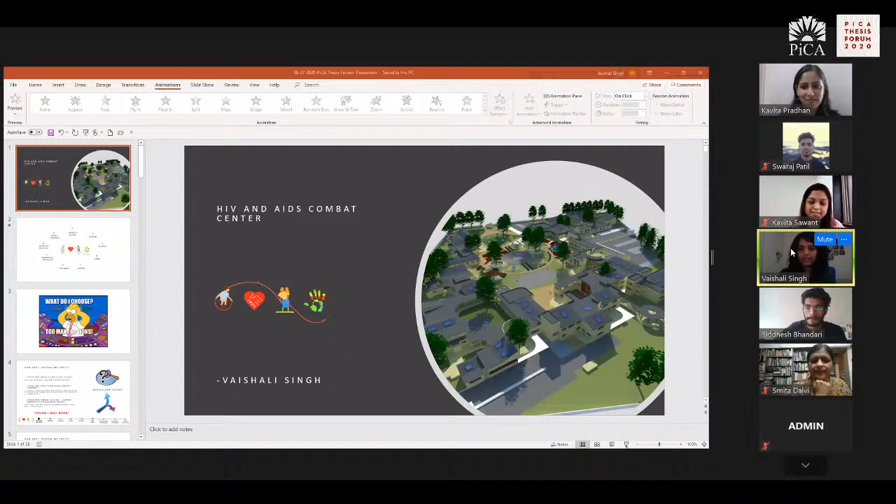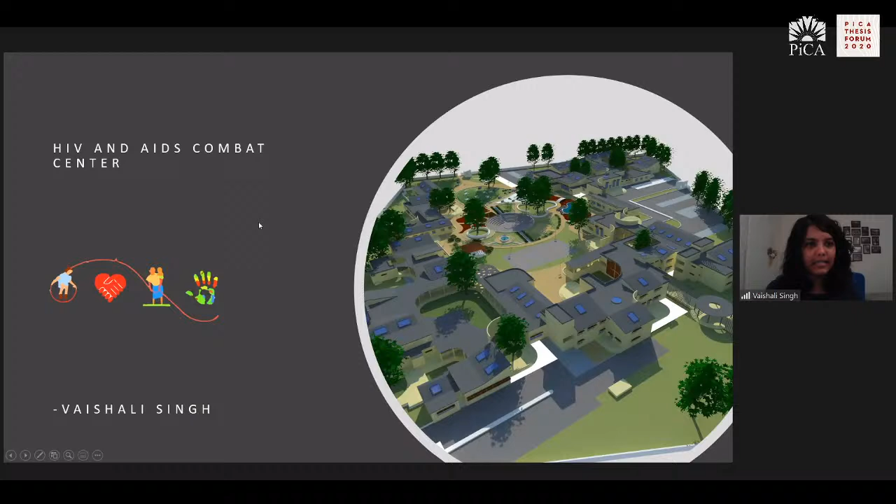All right, so my thesis topic was HIV/AIDS Combat Center. There are 9 steps that I'm going to follow to share my journey and the process.

First is going to be the research method. Second is the findings that I got from the research. Third is the solution. Fourth is the design. Then my master's work, my takeaways from the whole process, my profession in healthcare, the designing I've done so far, and how you can use your thesis as the basis of your future career.

So the first step is, how do I choose the topic? There are so many options. In design dissertation we always get an option of like 10 topics and then come down to one that we want. So you always have to question and ask yourself, what do you want? This is how I went ahead with my topic.

I always wanted to work on something that serves a user group, and to see how design can help make their life better. HIV/AIDS patients and their affected kids were the user group I thought of serving, and I wanted to see how designing can help serve their life, as it's difficult for them to survive here. They get abandoned by their family, they don't get jobs. So a campus that serves their healthcare as well as their living, and how design aspects can make it a little better — design and well-being is something that summarizes what I wanted.

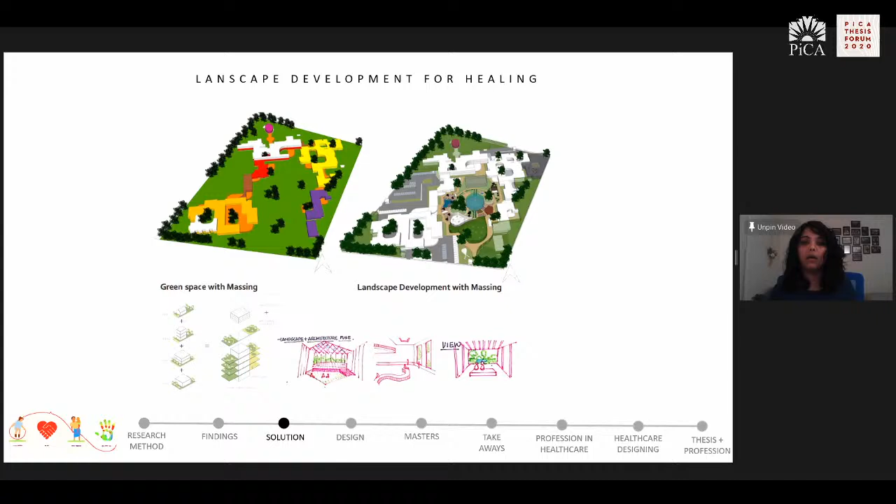So you see the transition of how a non-developed site with the building turns into a more interactive, active site by implementing those ideas.

The whole design program was very much based on my case studies, and I was fortunate enough to visit these places in Bangalore. They have a lot of care centers - there were almost 5 that I visited, and each had some spaces that helped my design.

There was a comparative analysis of these design spaces and even the type of spaces. I couldn't put those images because I cannot show it live, but the sketches give an idea of how they had courtyards for interaction, or water bodies for making the space more scenic and beautiful.

In the comparative analysis, there are points for each case study and how I propose the design program based on those points. It's a good approach if you want to figure out exactly what you want in your design program - case studies are the best means for it.

You always have to detail out your program a little more. You have to be very sure about what kind of space you want, what space type - like I had medical care unit, childcare school, staff quarter, and the cultural center. The medical care unit was for healthcare, childcare for the affected kids, staff quarters for those serving, and the cultural center for their living and work.

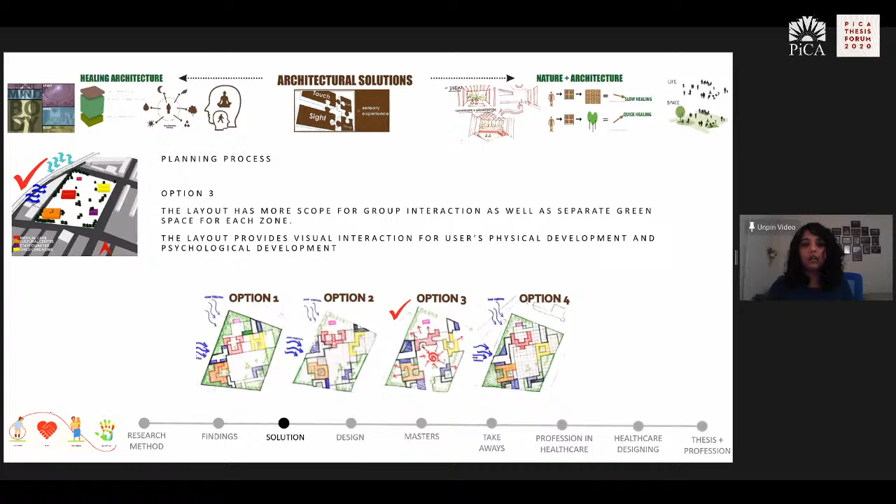Further clarification on the sketches - if you see these 4 options, I worked more on how many levels I wanted it to be. Is it going to look super tiny, or is it going to look bulky, was an idea, and working in 3D definitely helps when you enter the site and see the space.

This was very helpful thinking about the codes, the areas, connectors. So if you see, it started with the blocks, then the first floor, then the common spaces, and how you can include verandas in there. Brown color is the representation of that.

And then also zoning - private zone, semi-private zone, and public zone. I tried to zone those out. And in the end, massing and the landscape.

So if you see the plan, that's how the fluidity works. On the east side, you start from the empowerment center with a nice courtyard and spaces for interaction, for sharing, conference areas, counseling rooms, art space, museum space, connecting to the admin, where there is a separate entrance from the admin.

If there is a car, loading or unloading, you need to think about those service parts too when designing - how a van is going to enter, a pedestrian is going to enter. There is a different entrance requirement for each, so it goes hand in hand.

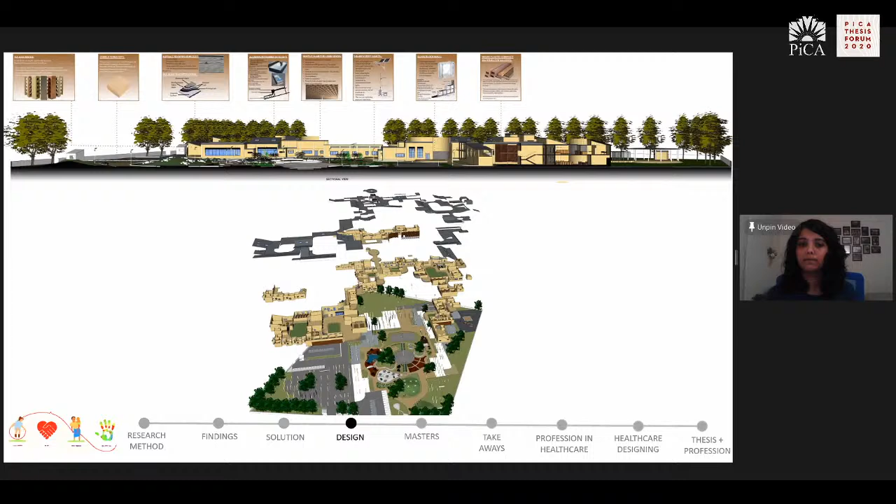I think detail is a very important part when you're doing thesis. You need to talk about how your structure is going to work out. I did put skylight, I did put the detail. I also talked about why I need it, how the female ward will get nice lighting, how a double facade can help maintain circulation and ventilation, how an angle in a louver can stop or regulate wind and sun. So those were the design elements and ideas which I tried to explain through the sections.

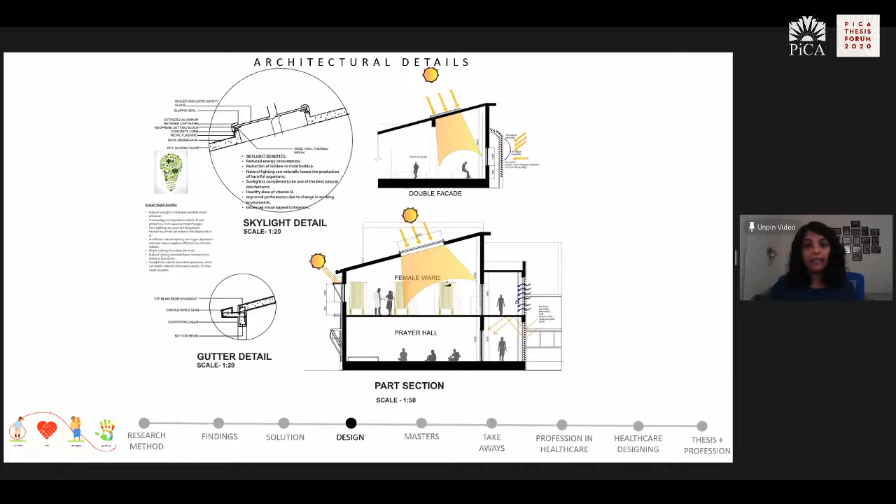And then for services, of course, I calculated for sewage treatment, I calculated for the overall water required, and there was a rough planning. I followed the codes and tried to figure out if I'm getting enough water treatment space and enough water for the users. So yeah, calculations help. We try to run away from it, but eventually it helps. So you can go ahead and look for that too.

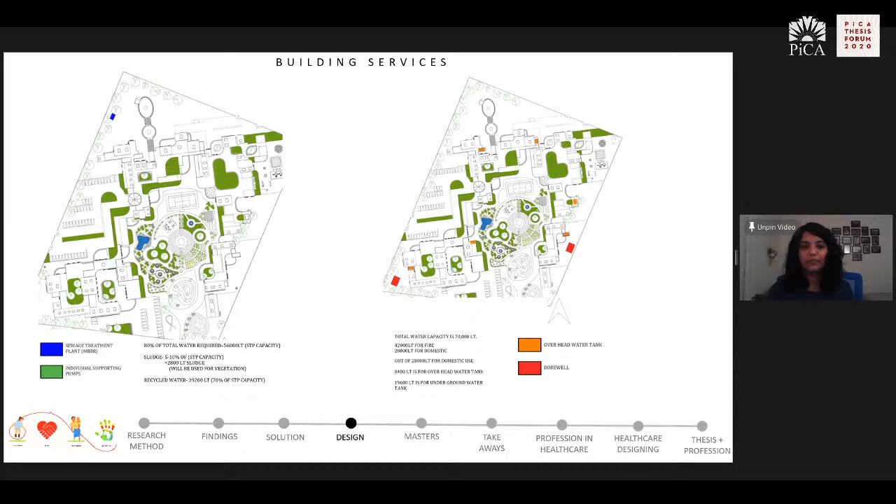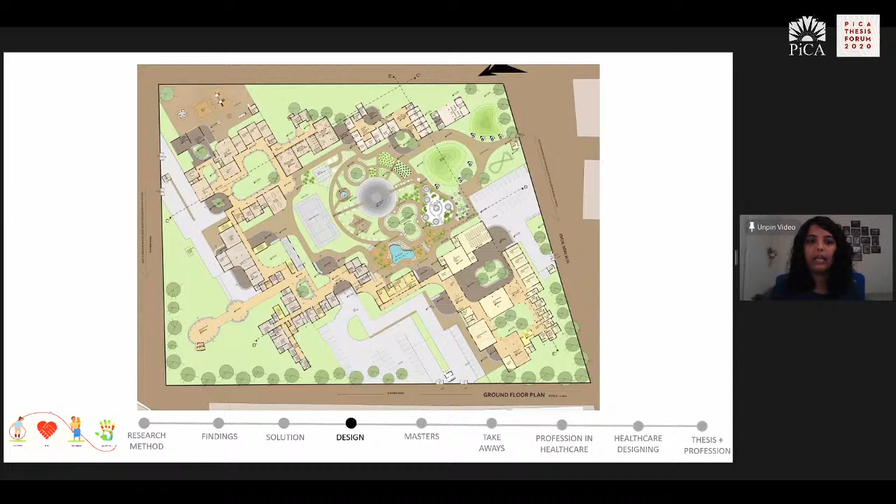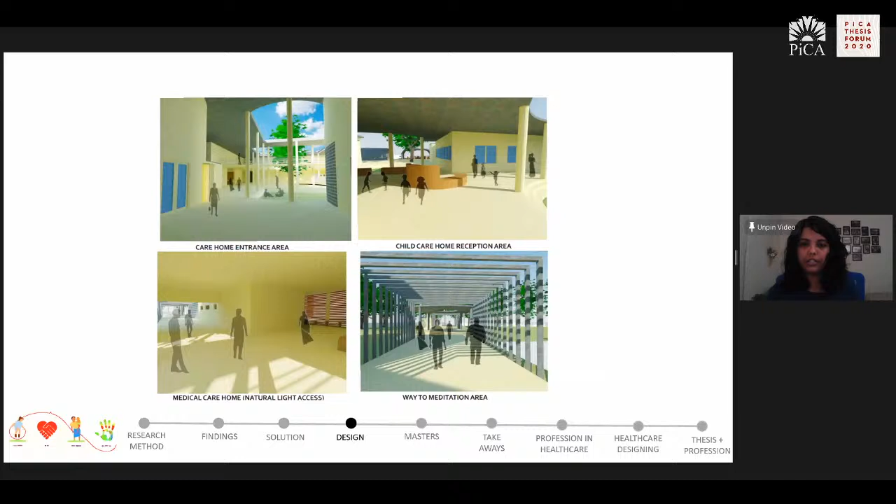All these elements created a nice gesture and welcoming space, eventually coming down to the meditation space. And then I think it helps to see the views, definitely helps to understand the quality of space. So I used quite a lot of views to explain those things and how these spaces are looking.

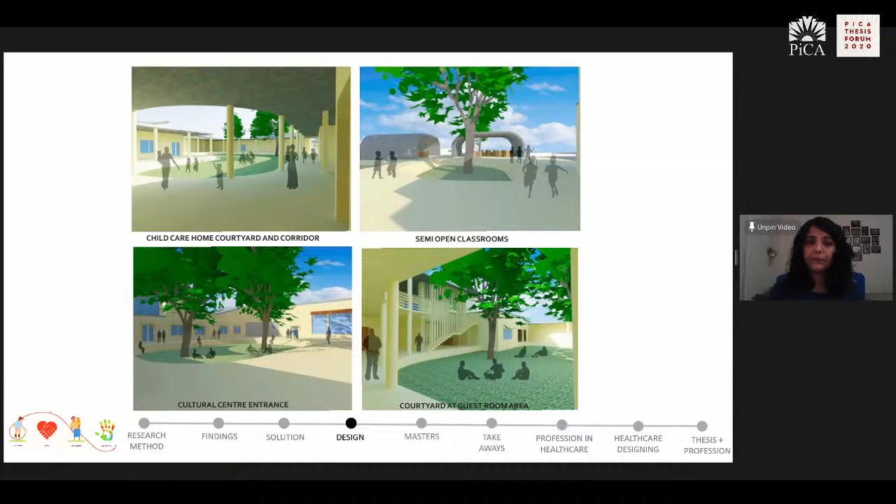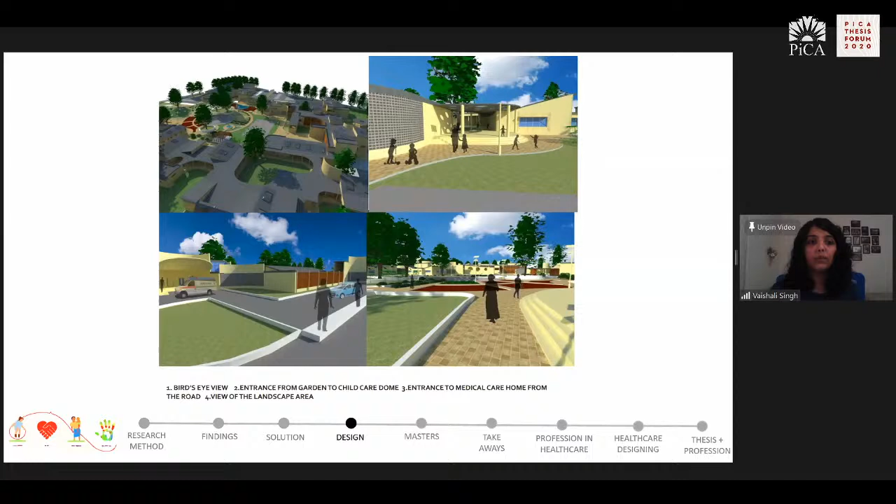So yeah, the entrance, the landscape area, the entrance to the school, the bird's eye view of the whole site with the central landscape space. And then some more views explaining the overall planning from the meditation side, from the medical care side.

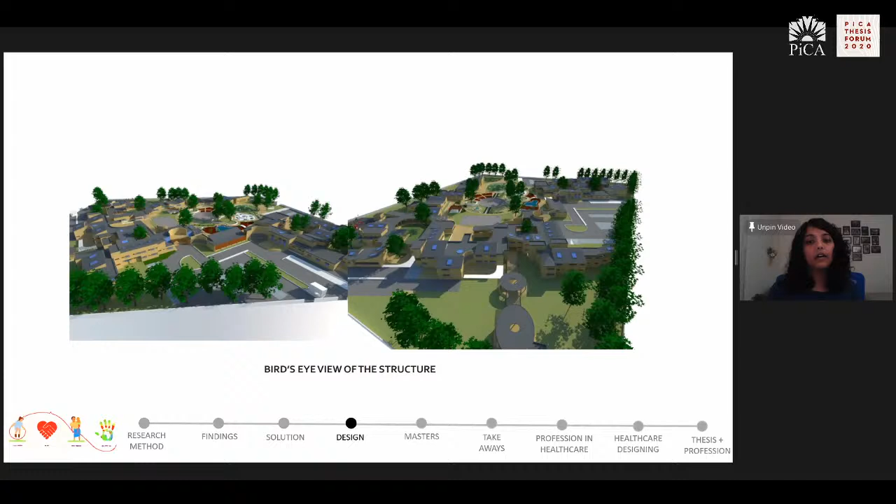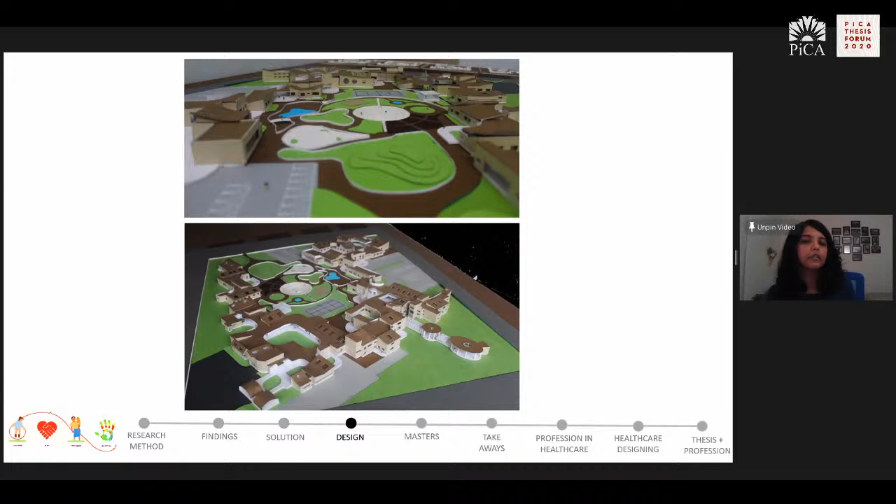And finally, with the help of some of my juniors, and me, of course, I decided to show some materiality through my model, thinking about how colors can help when we are actually designing in there. It doesn't give you a very clear idea, but it takes you somewhere where you can imagine how it can look like if you're going for these colors. So I tried to do that in there.

So this was my thesis part, and I wanted to know if you guys have any questions, or do you want me to continue?

Kavita ma'am, what do you think? Should I continue? Yes, go ahead. So yeah, I think after thesis, thank you.

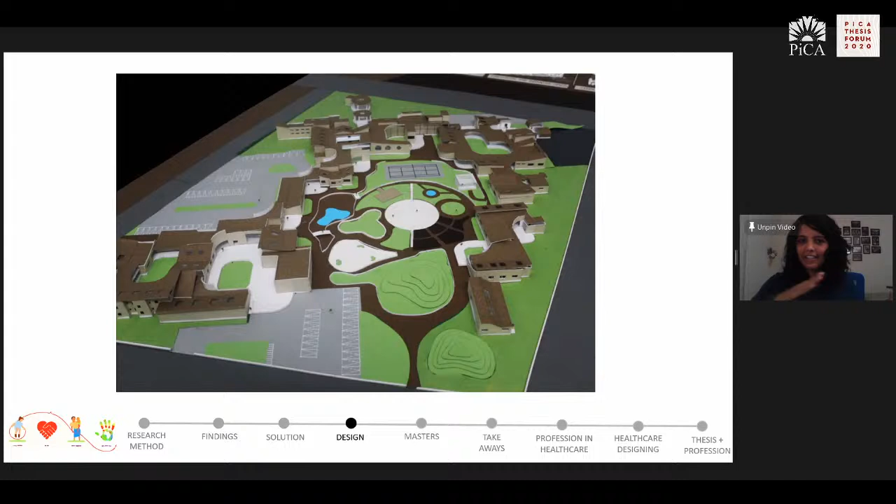After my thesis, I realized that this is something I'm going to continue. But then masters happened after a year of working, and I think after 5 years you realize that school is the time when you can experiment and do all the things that you want to do, because professionally it's difficult to follow it. So I decided masters was going to be that time. I did that in undergrad too, but then that is like with one experience and then you continue with another. So that was the idea.

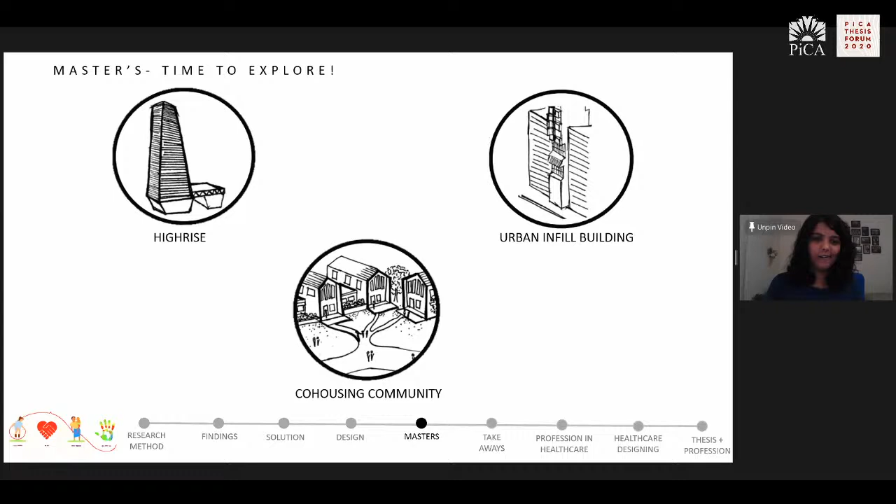So I did that. And as it was my time to explore, I looked about and worked on high rise. I worked on urban infill buildings. Urban infill buildings are usually in the downtowns, in the main city. They are back-to-back high rise buildings, and you have two common walls, and it just goes continuously all throughout, and just the front and the back are open. So you need to create a whole building within that space. And the co-housing community, which is like a cultural community in the US, and how that works. So I tried to touch all those parts that I could work on in designing.

So this was my first or maybe second project, a high-rise building where we were fortunate to have a project where we could replace Trump Tower Chicago and design and talk about our own version. This was more of vertical interaction. Of course, we have done so much planning and zoning, but this was everything in the sky, not on the land. So it was a different experience where I tried to understand how the vertical circulation works, how you divide the spaces vertically. It was all vertical experience, and how the structure, especially when you're working on high rise, is a very important part, and how you're going to work on it.

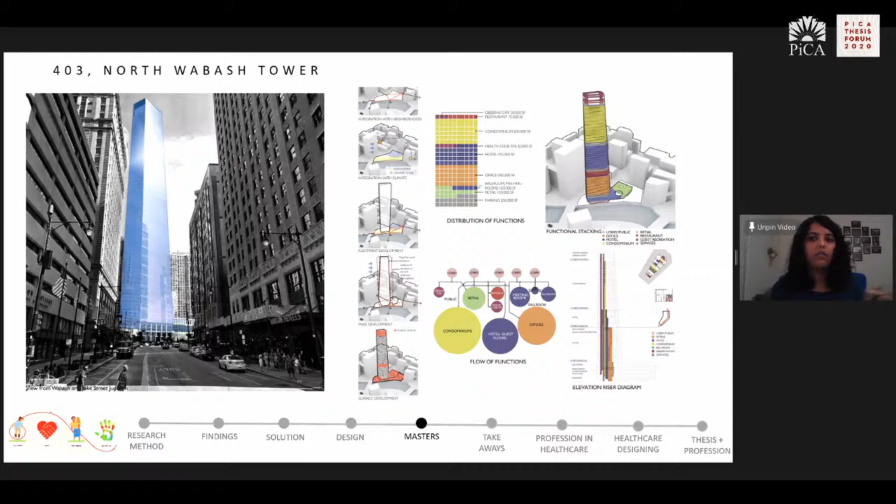So those were the aspects. If you see the graphics, we tried to explain the concept through colors showing what all spaces are going to be there. The offices are in orange, the purple part talks about the hotel, the yellow part talks about the residential spaces, the condominiums, and the top part is talking about the restaurants and observatories. There's always a reason behind these spaces. If you have an observatory in the top level, you can see the whole view and get more revenue out of it.

Some of the renders that talk about the space. This was one of the streets from where we could see the Trump Tower right now, but we replaced our building with that and see how it looks like. Then the section talks about the structure, how we were using columns, how we were using concrete, and how the facade worked out.

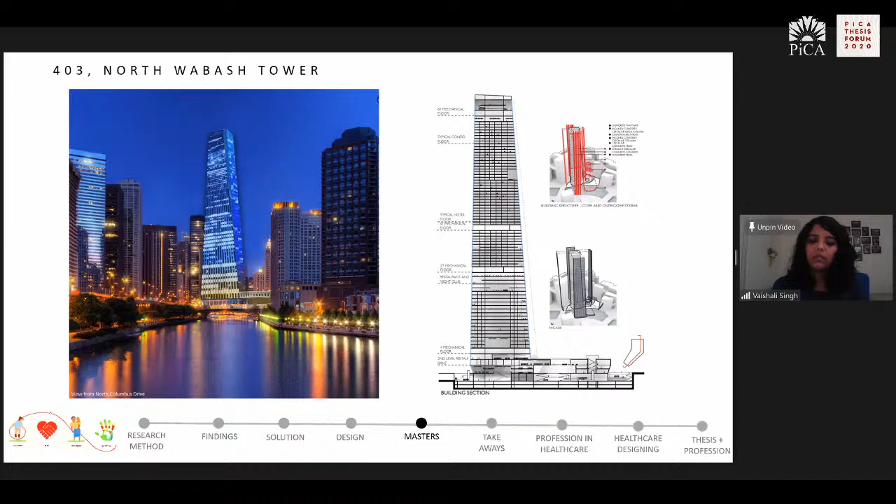Second was, of course, the urban infill. This was my favorite because this was a challenging site with 17 feet wide and 39 feet deep space, a very narrow site, and we had to create a long, tall building in there.

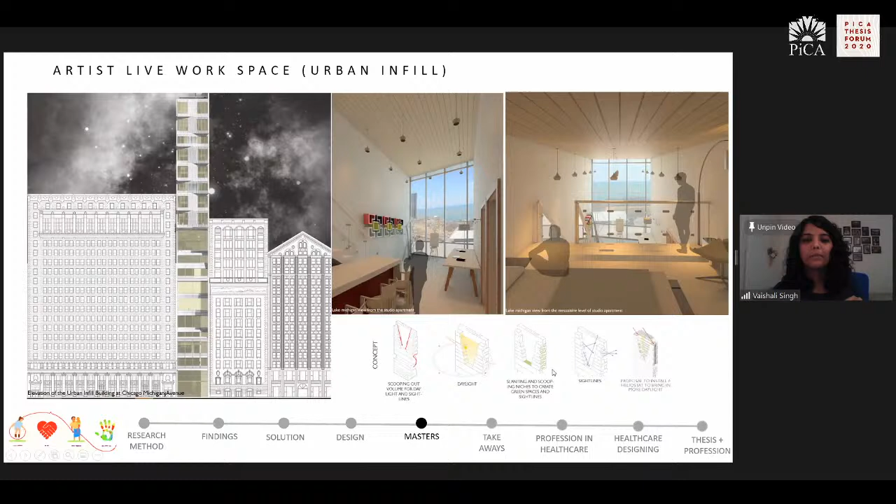If you see the concept, we tried to bring in some green space in the middle of the building, and how that can help the residents to enjoy. Then a section talking about the activities.

This was an artist live-work space, as this site was just right opposite to the Chicago Art Center. This was a proposal of an extension to it, so the artists can live and work there. There was a living space in the top area, a central space for exhibiting their work, and central spaces for interaction with the school, which was connected to this building, and the lower spaces for exhibiting.

So I tried to work on a lot of softwares, and Sefaira was one of it. Sefaira is an analysis software, like a daylight analysis software, where you can understand how much light your building is getting, and work out how it's affecting the overall energy of the building.

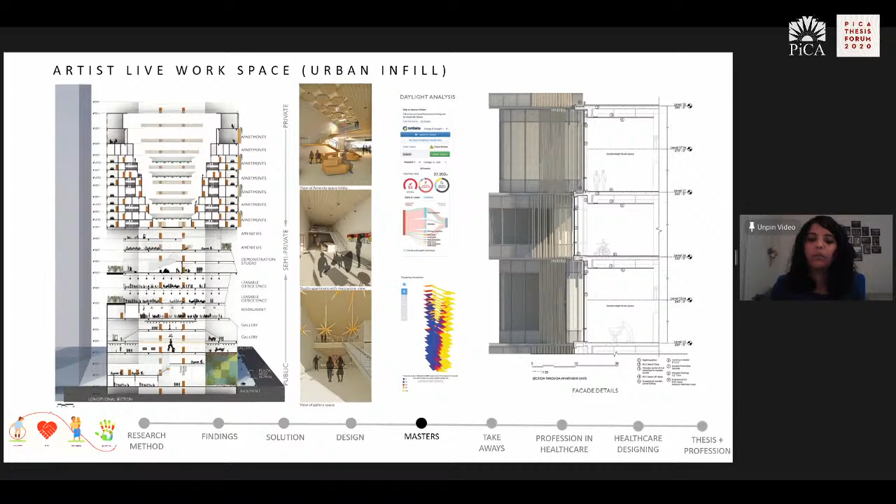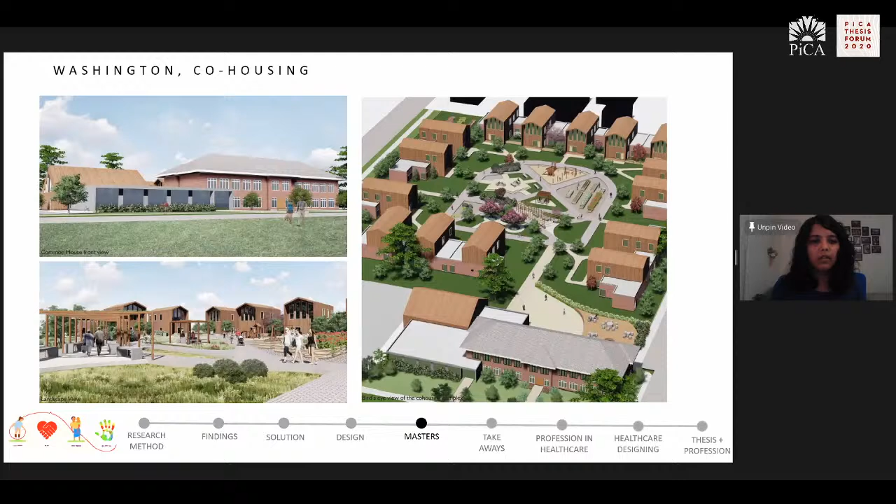The last but not the least, this was my final year project, which was more of the cultural aspect of the US and how we actually buy houses in a co-housing community and how we interact. This was more of planning and how you blend in landscape and opportunity to interact.

And then again, I worked on Sefaira as I knew I wanted to learn more about it and how passive houses and zero energy buildings work. So this was the idea to initiate in the whole planning.

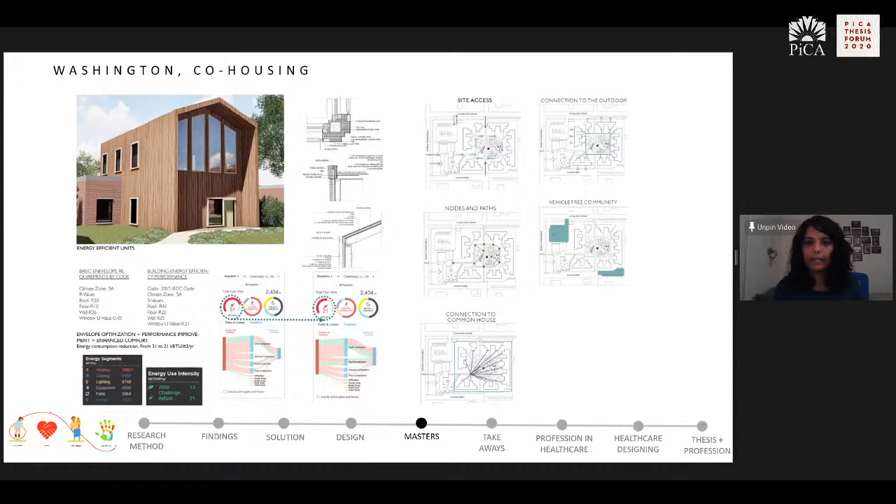Yeah, so this is my master's. Thinking about the takeaways from undergrad to grad journey, I think for me the takeaway was my technicality was my strength because I was always into the technical aspect, and I was always focused on the health and well-being part, on how architecture can help for health and well-being. That is why I concluded that healthcare is my interest.

So right now I'm working for Boulder Associates. It's a leading healthcare design firm, and they do lots of different types of hospitals. I usually work on cancer center and oncology clinic and primary care projects. These are some of the work. I've been in this field for, well, they have 37 years of experience in this field, and I think I'm enjoying it so far. It's been 1 year.

These are some of my work that I've done so far professionally, and it's right now getting constructed. Hopefully, once it's done, I'll be able to share it with you guys. But yeah, that's what my healthcare journey looks like.

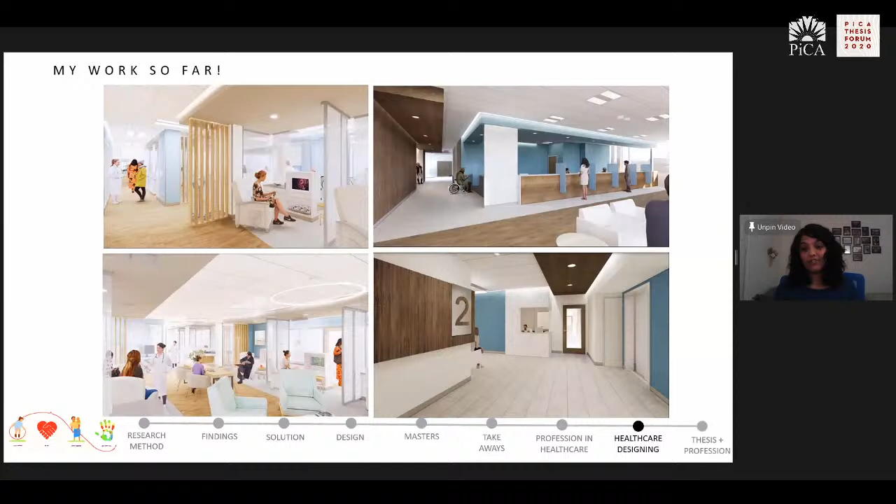Last but not the least, thesis plus profession: your undergrad thesis can help you to streamline your goal. So think about how you can take a first step and see if that can help all throughout, and how you can take this study ahead in the future. It's not mandatory, you can switch, you can swap, but it's good if you can think about it. Yeah, that's it from my end. Thank you.

Today I'm going to talk briefly about my thesis topic, which has 4 parts to it, and how to go ahead with your thesis. So it's basically my thesis journey in a presentation.

First, I'd like to talk about how to select your own thesis topic. Selecting your thesis topic is not an overnight thing. You'll have to think about it from the start of your architecture journey. The first and foremost thing is your field of interest. You should figure out what your field of interest is and think about what you want to learn new.

For me, healthcare was never part of my academic syllabus for the first 4 years. I was very curious about how a healthcare facility works. This formed the basis of taking healthcare as my thesis topic. As you all know, thesis puts you in a zone where you can learn or gain information about a topic that you want. That's how you select your thesis topic.

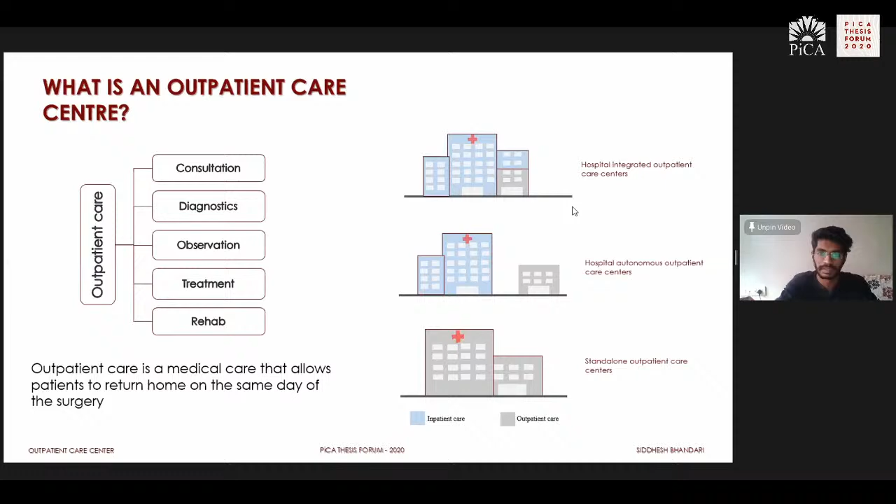They also provide rehab care, but all this is done on an outpatient basis, meaning there's no overnight stay associated with it. During the initial days of my research, everyone was asking me why I'm proposing an outpatient care center and not a complete hospital. They also tagged it as a very small project for a thesis level.

What I feel is that you cannot tag any project as a thesis-level project just based on its size. There were many aspects related to why I selected this as my design project and not a complete hospital. During the study I made on healthcare projects and the healthcare system of the city, it basically showed that it lacks a lot in healthcare facilities provided on an outpatient basis.

The condition was that the system was designed for about 7 million people, but it currently caters to about 13 to 14 million people. The main findings around my site were that Mumbai had just 0.9 beds per 1,000 people, which is much less than most foreign countries and places. It should be at least 2.5 or 3.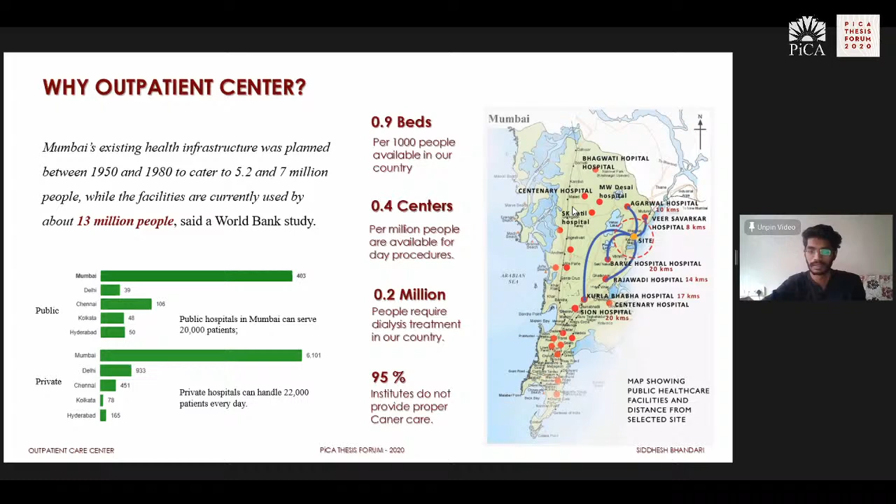This was also a main reason why I chose not to set up a complete hospital, but to focus on parameters that cater to all these setups. The diagram on the right shows the public healthcare facilities and my site location in yellow. Most public healthcare facilities are quite far away from my setup's location.

After deciding on a topic, you need to do brief research on the user group you're catering to. A hospital or any healthcare setup basically has three user types: the doctor or staff of the hospital, the patients, and patient family members associated with them. These three users need to be studied thoroughly before starting any healthcare design program. Evidence-based designing is basically what you do beforehand to get a direct user study from the user itself.

And you figure out the problems related to the space directly. So evidence-based designing has three parts majorly.

How you do it is you select a place of the issue where you are supposed to deal with the three typologies of your user groups. Then you interview these people in person, and also you can try out Google surveys.

So this is what I did. I got into a public medical hospital for my observations and took out many interviews from the people of the various user groups. This was done by formulating a questionnaire survey specially designed for the user groups. You hand it over to them, so it can give you a rough idea of how the people feel the space and how they want to feel like.

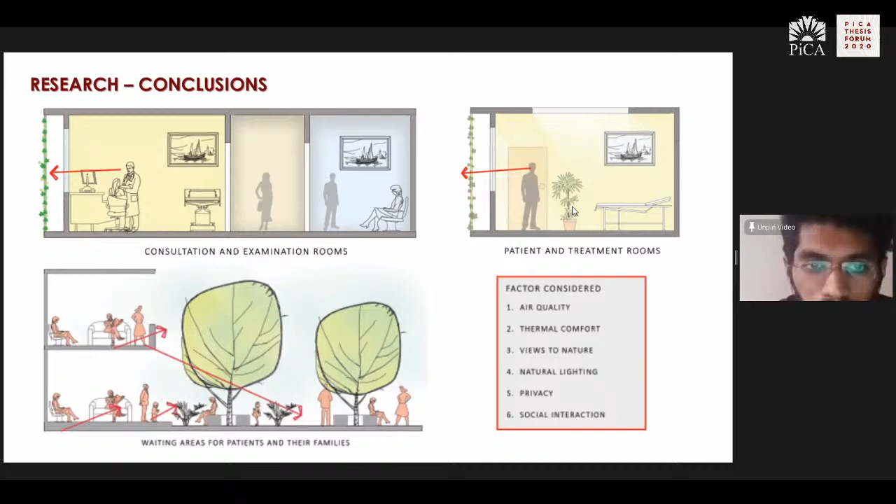So these were the findings from the research that I made, and the conclusions were jotted down, and then a certain typology was formed during the research stage that I needed to follow during the design stage.

The parameters that you get at the research stage should be incorporated in your design stage. If you're concluding that there need to be more break spaces, or you need to improve the privacy of a building or a department, what can you do? So there will be permutations and combinations related to that.

After the permutations and combinations, you get to a design wherein you can propose a typology where you give buffer areas between consultation rooms and waiting rooms, which would provide a buffer for the doctor and also give a sense of privacy inside the clinic.

Then there are patient rooms where you need good views and a good amount of natural lighting and everything, which is conditionally lacking in most of the public healthcare facilities that we see in our city right now.

Also the waiting experiences, as you'll see in the further slides, I'll show it in detail. To make better experiences for people waiting inside the structure, you need clean and well-lit spaces, and also some kind of privacy while inside the department.

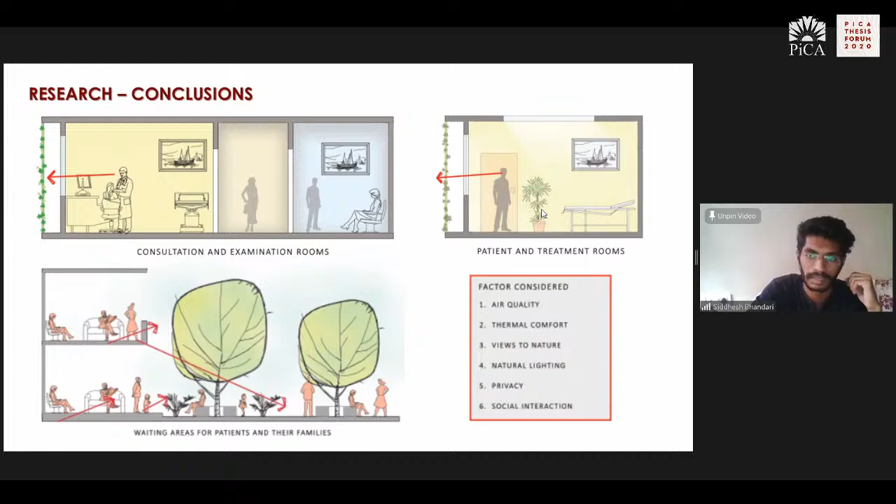So these are some basic schematic sections that I worked out in the initial days of the research. What I realized is that there were four basic factors associated with any research conclusions. I termed these factors under the headings of functional, psychological, physiological, and social.

There are some facts connected to these parameters which you need to follow. For functional aspects, if you need to improve the functional needs of a space, you need to consider the adjacencies of the space. Zoning should be as per the functional needs of the space, also to reduce walking distances and make wayfinding easier.

So the ideas are the solutions given to the facts and needs of the shortlisted factors. These ideas were put into consideration while designing the final outcome.

The second part to the methodology of the research phase was precedent studies. Precedent studies come in formats, like you visit the space actually, and then you refer international or national case studies online or through a book.

To know a healthcare facility completely, I started from the basic unit, which is a clinic space easily accessible to anyone, like a physio clinic. Then there are specialty clinics like dermatology and dental, which have a completely different setup. So I shortlisted a few small private and small municipal hospitals, 10 to 15 bedded hospitals, and then I researched two big hospitals, like 500 bedded hospitals.

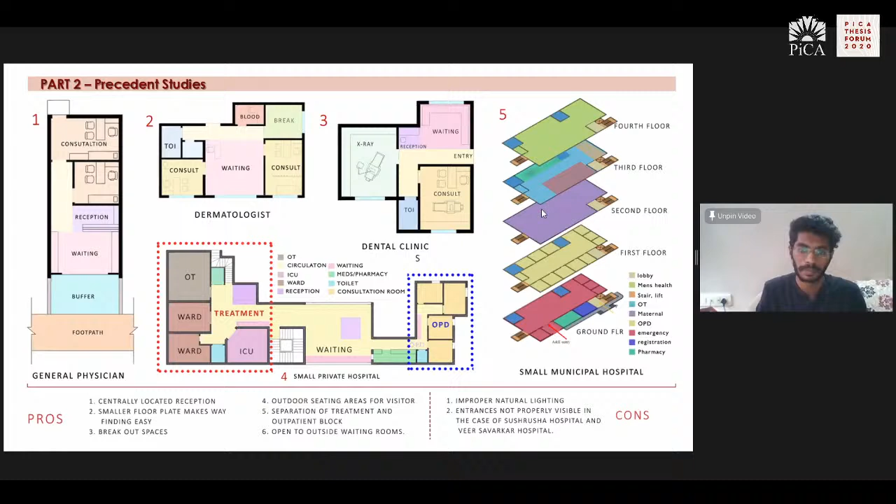So precedent study, these are examples of the live precedent studies, how you do it. First you go to this place and sketch it normally, and observe it while sitting there in the space for about 2 to 3 hours. Observe the pattern of how people walk, how people communicate with staff members, do they feel safe inside the structure, or do they need something not provided in the current setup. So you note down the pros and cons of each setup, which would help you in your final design outcome.

These are case studies of some bigger hospitals that I visited. Bigger hospitals will normally give you bigger problems and you have to figure out newer solutions to them. This is one of the case studies that I found in Mumbai. There were many pros that I found from the design, which I jotted down and wanted to put in my own design.

That's how you study a space, figuring out the possibilities that you can have in your own design, and also observing the problems in the current setup.

The other 2 are international case studies, just to get an idea of what kind of design structures are happening outside our country and what kind of architecture they follow. The pros and cons are the design features that I liked, which are not provided in our city or our pace of work.

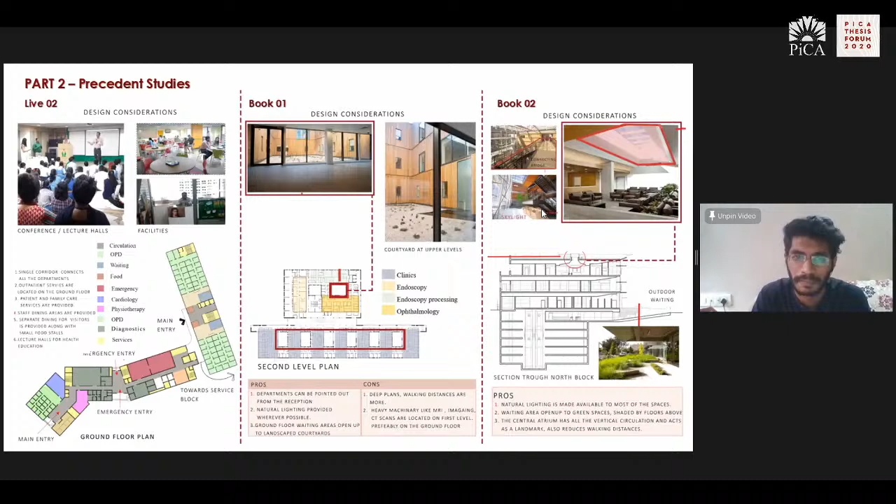The design features that I took from this are how they control the daylighting aspect of their setup, and how the wayfinding and walking distances were reduced, because walking distances and wayfinding are the most important pointers that you can work on in a hospital setup.

The final part is the comparative analysis, which will finally give you your design brief. The comparative analysis of the structures you analyzed will give you an idea of how the structure lacks a quality and how the structure will gain a quality.

This is an important step in making your design a bit better than what's actually provided in the city. The factors that I compared gave me an idea of what kind of design features can tackle those problems.

All the research is concluded into pointers that are essentially required in your design. You cannot go ahead in your design if these pointers are not satisfied. It's basically making the design simpler and the design brief easier for you.

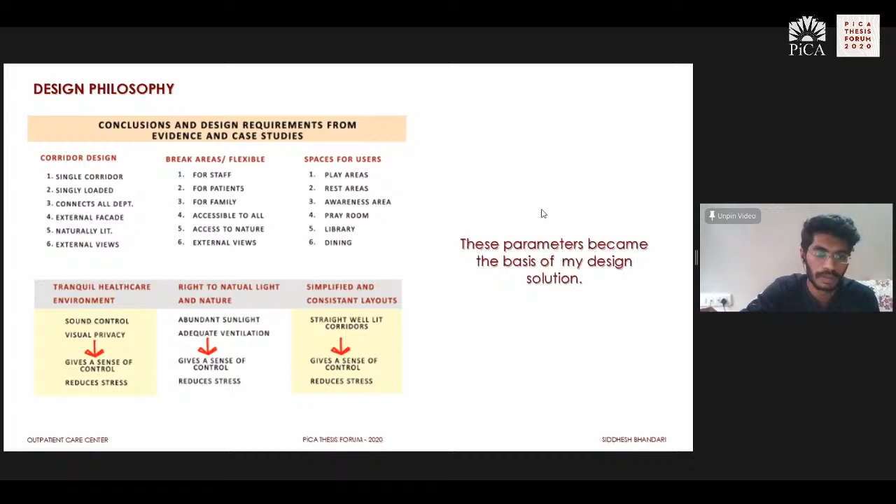Your research program is basically a process in which you'll figure out what kind of design ideas you need for your structure and what kind of design brief you need to follow. It will also give you the parameters you need to provide extra for your users to feel happy or make a space better. So this is a normal bubble diagram that we usually follow while designing a healthcare setup.

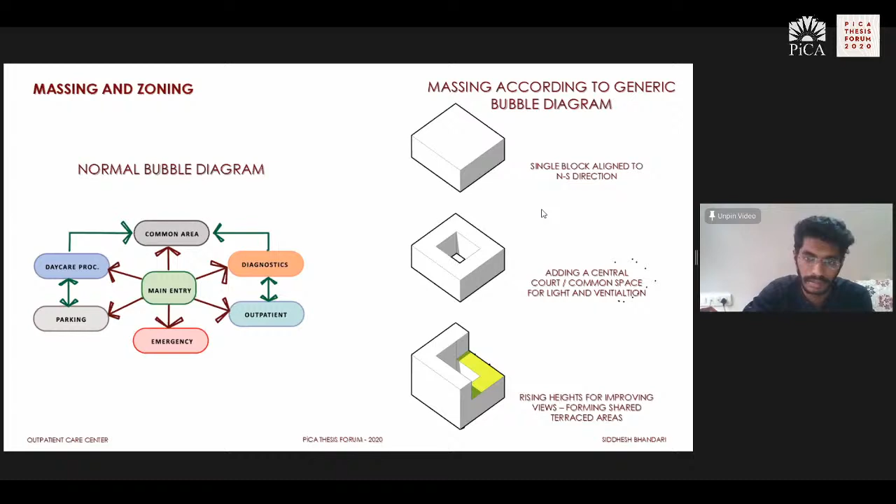So you have a main central area, then you enter the main central area and you have all the other departments around it, so the walking distances are reduced. But when I did the massing with this module, there were 3 to 4 options that I made for that bubble diagram, but it was not satisfying the needs that I actually wanted in my design. There were a lot of combinations that went behind it, but nothing came out as a positive design solution.

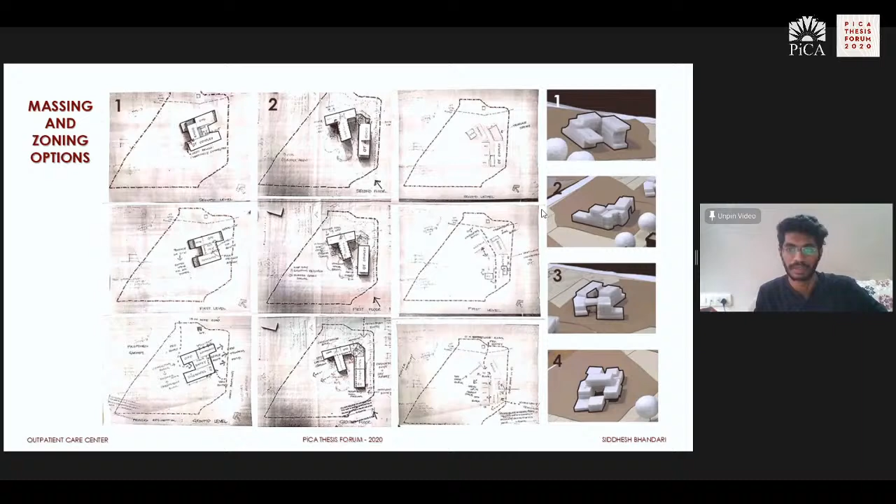So I basically started with a single block which had all the requirements of my structure, like the complete areas. Then the basic requirement was to get in more light, so I added a central courtyard which will provide more light all over the structure. Further developing the form, you need to change it a bit in heights and spaces to increase the volume and provide lighting all over the space. So you stagger it a bit, and this staggering also helps you in having cross ventilation throughout the structure.

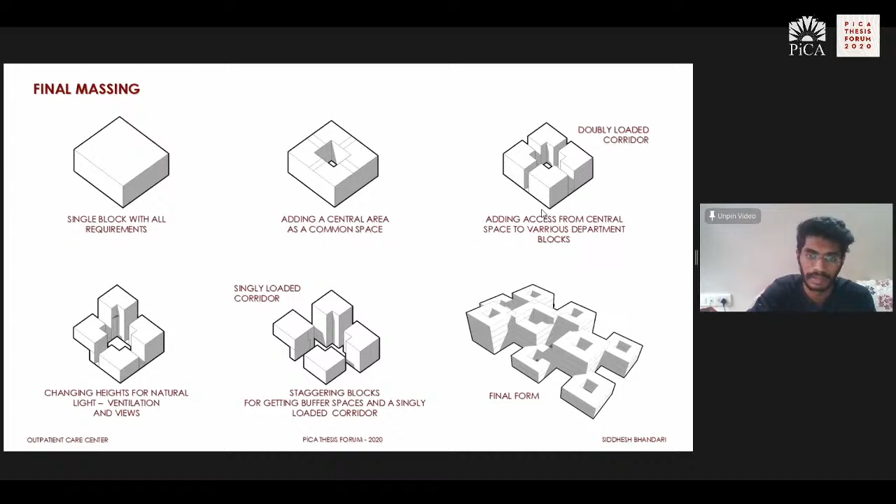So after a few combinations, this is how my final form looks like. The basic concept behind it was having various modules connected to a single corridor which runs straight, so there's no way you can get lost inside the structure. There are 2 corridors in my structure connected to the various departments. The square blocks are the various departments, and the green blocks are the buffer spaces between the departments.

The spaces were basically segregated into 3 types: open or soft spaces, semi-open spaces, and hard spaces. The first 2 types were public areas and gathering spaces or waiting areas which were not having any rules or regulations related to healthcare setups, because there are certain parameters you need to follow when designing a healthcare area. So these open and soft areas could be adjusted according to my needs, but the hard spaces required following certain regulations while designing those areas.

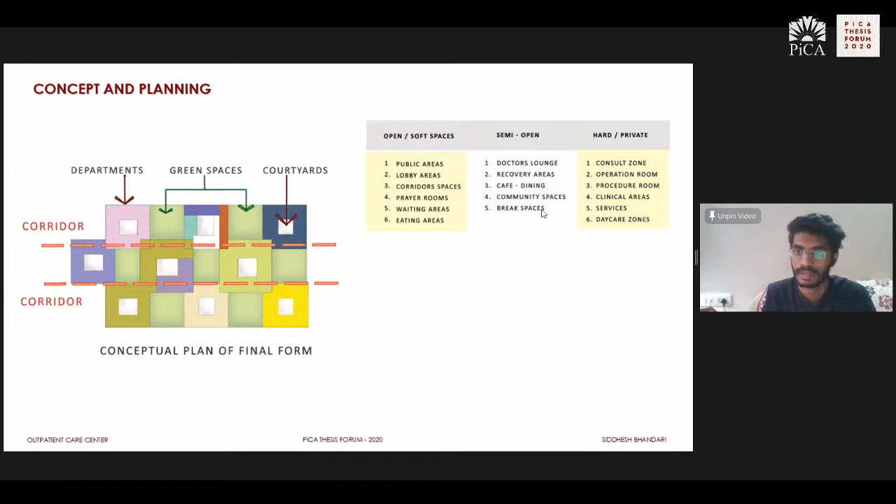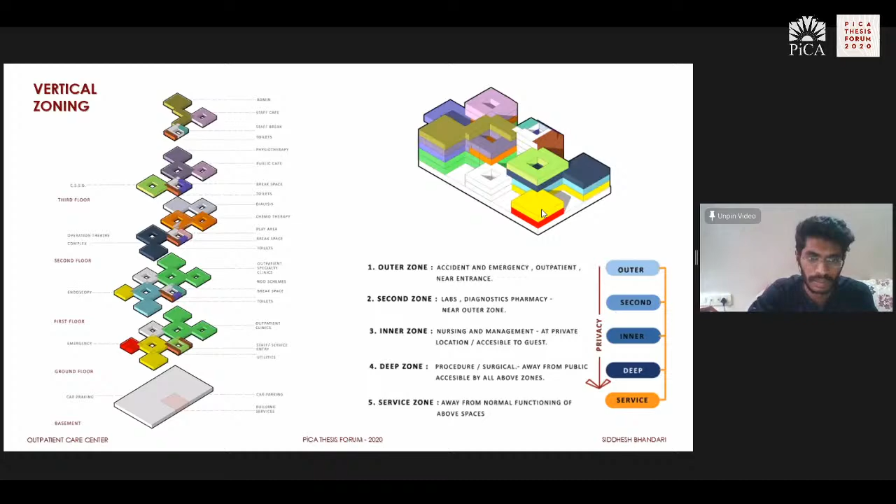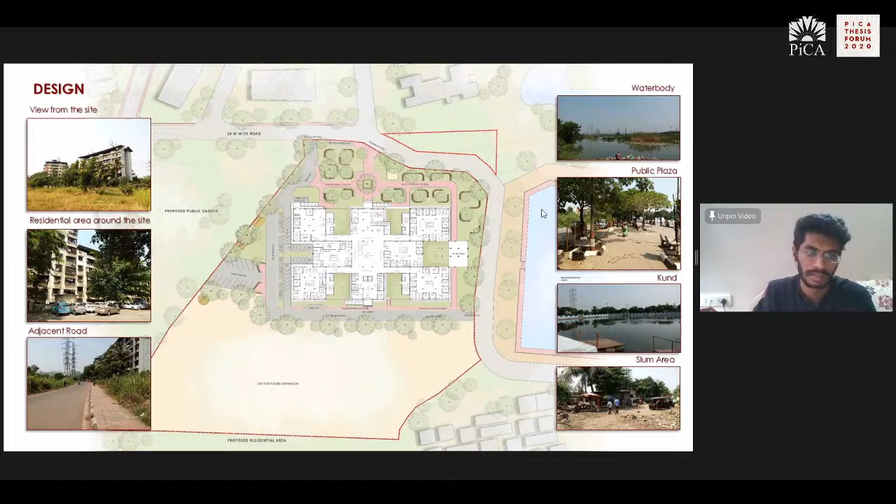Coming towards my site, it was located in Mumbai, connected to the Eastern Express Highway near Bhandup. According to the DP, it was proposed as a healthcare setup plot, and the adjacent plots were all residential areas and public parks, etc. So it was a perfect site for proposing a healthcare unit, with no industrial areas or anything else that would probably disturb the working of a healthcare setup.

So looking at the site plan, I had two accesses: one for the patient and one for the staff, given from two opposite directions. From the north, there's a regular access for patients, and from the east side, there's staff access. This basically segregates the staff and patient entry and avoids major gathering at the entrance. There was also a separate entry provided for the services proposed inside.

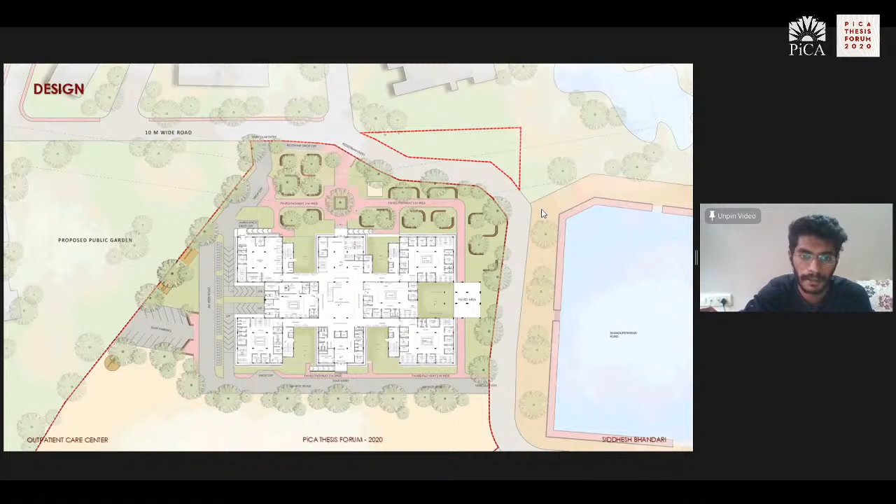So this was the basic plan. As you can see, there were two basic corridors that run throughout the structure, and all the square blocks are basically the individual departments of my structure. So to make it simpler, I'll just color code it with the types of spaces that we segregated earlier.

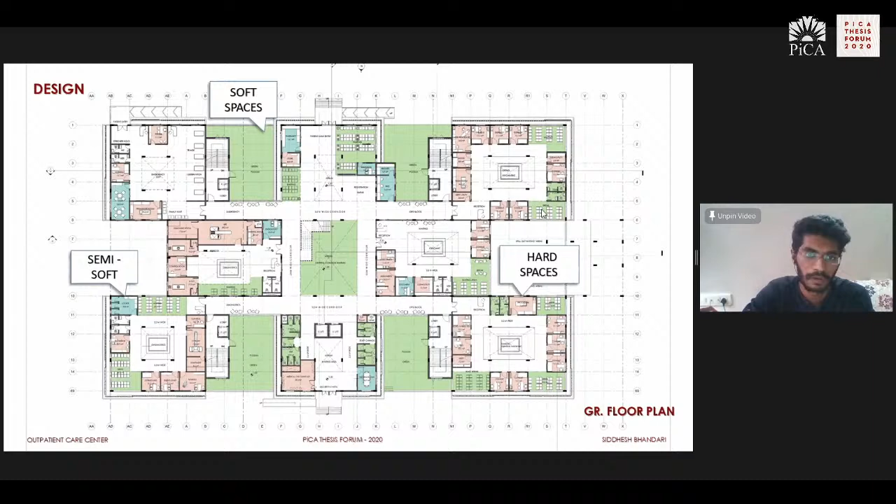The red are the hard spaces and the green ones are the soft spaces. There was a condition for placing soft and hard spaces around the structure, for which the lighting played a very important role. The soft spaces and semi-soft spaces should preferably be placed on the external facades as they require maximum lighting and ventilation. The hard spaces can be provided inside the structure wherein there is less natural light and ventilation available. So this helped in zoning the soft areas in a better way.

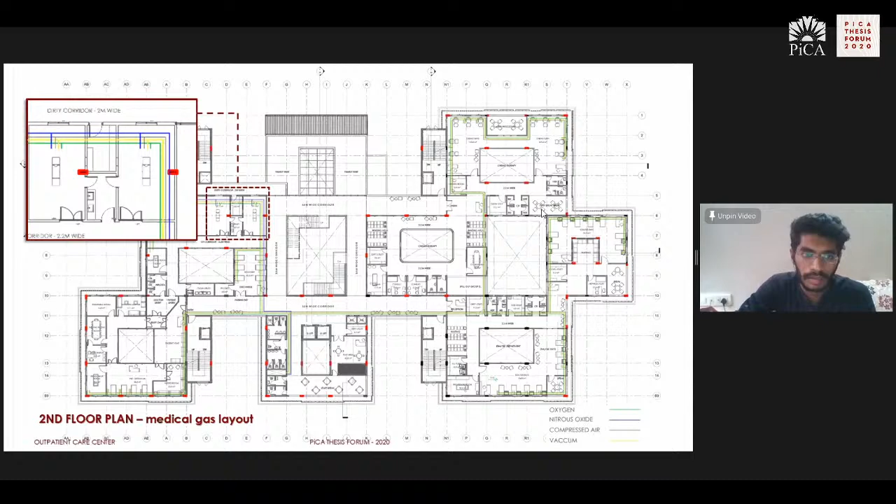Then there comes the planning of operation theater. Apart from the design aspects that we consider normally during a thesis, there's the planning. The hospital design mostly focuses on the planning aspects of the layouts. There are certain regulations that you need to follow when you're designing a healthcare specialty clinic.

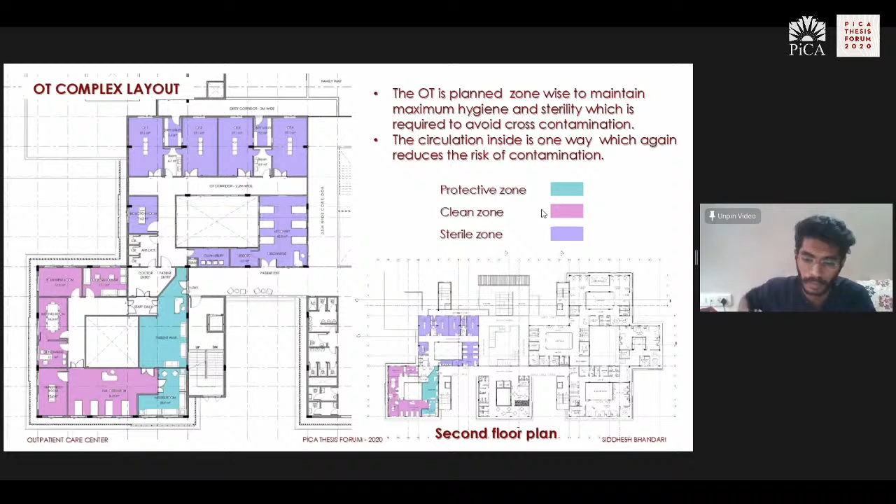To give you an example of a space, there's an OT complex. If you consider an OT complex, there are 3 respective zones that you need to follow, and every zone has different rules to follow regarding circulation. So if you are starting from the protective zone, you enter the clean zone, then you enter the sterile zone, and there's no way you can travel back into the opposite direction. That's how it's planned to keep the OT sterile and to avoid cross contamination.

So that's how I'd like to conclude my presentation. There were some views that I'll show you. This was the central main gathering area that you enter directly into this large space, and you subdivide yourself according to the departments that you want to follow.

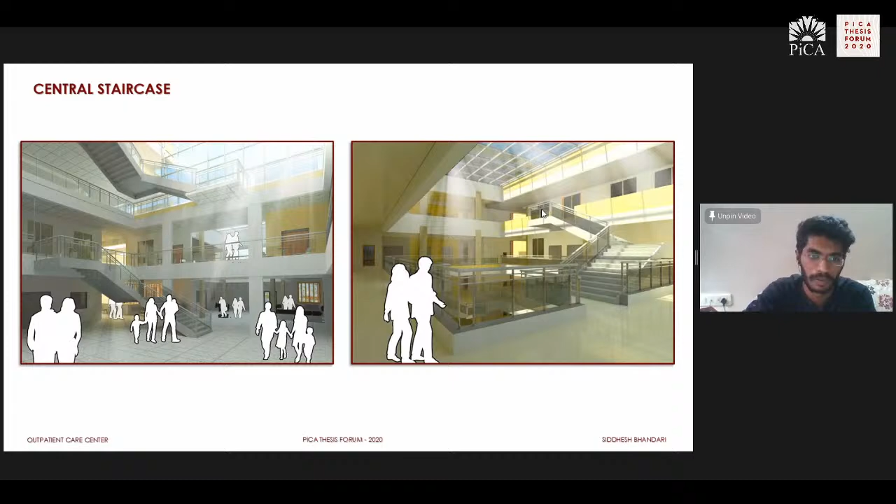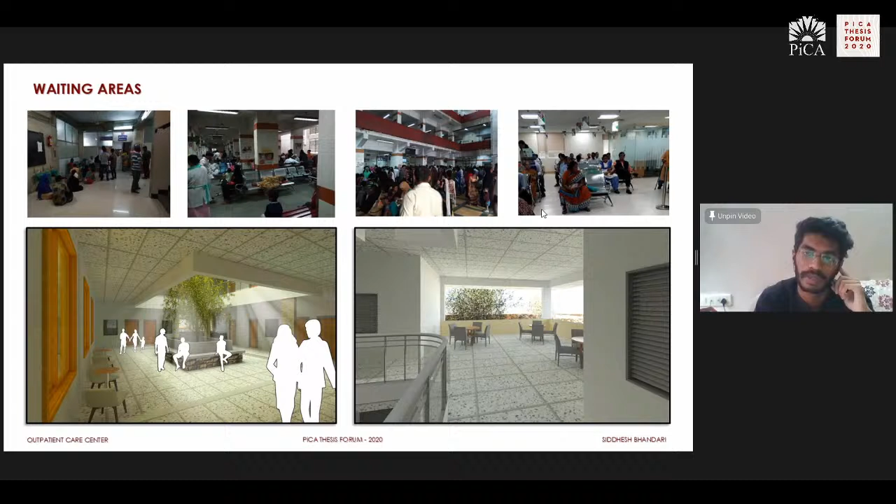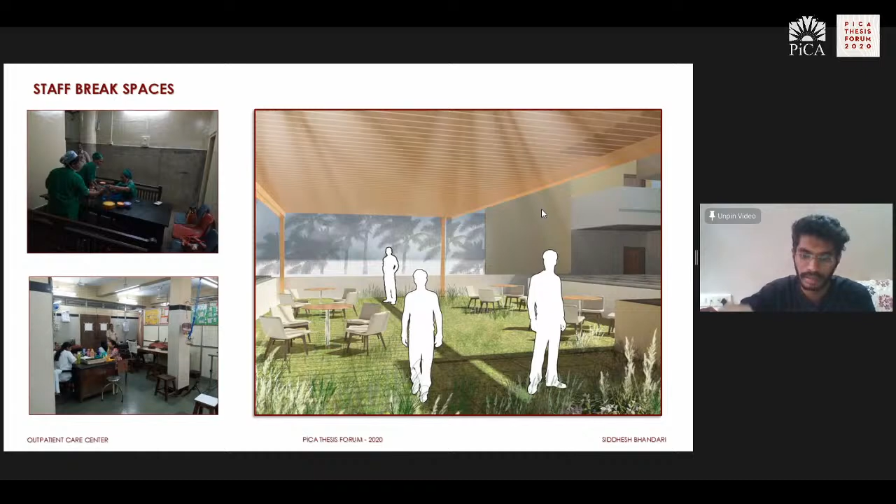The smaller pictures that you see are the problems that I have observed during the research stage, like overcrowding at spaces, not enough natural lighting, and no ventilation. The lower renders are solutions to problems normally seen in a healthcare facility. For staff members, there were no proper sitting areas or break areas provided. On the left, you can see healthcare workers and how they work during break hours, and on the right, it's an attempt to make their daily experience at a space better.

Then the corridors. The corridors are one of the important members of your design. The lower pictures show what you usually see in the current setup - no natural lighting, no ventilation to the corridors, and they are dull and monotonous. In my design proposal, I tried to make it well lit and well ventilated and not monotonous. I also added some extra sitting areas around the corridors for family members.

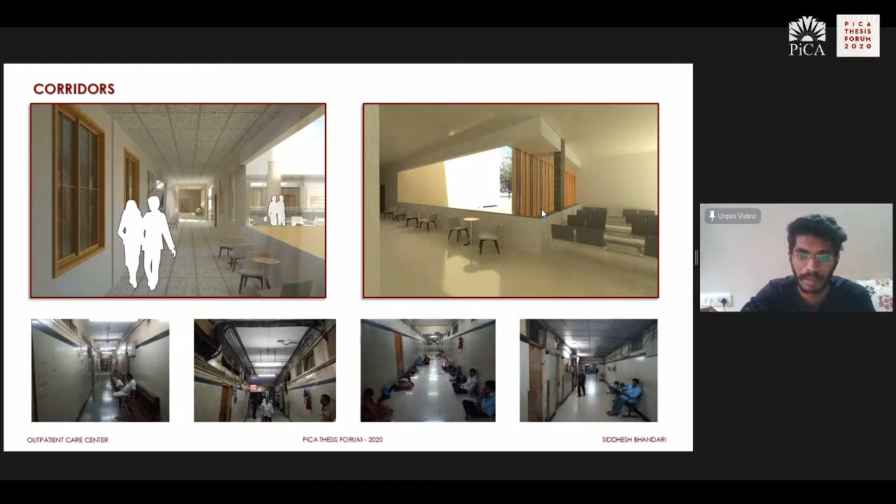So this is the final view of this construction. Thank you.

Kavita ma'am, would you like to take it over?

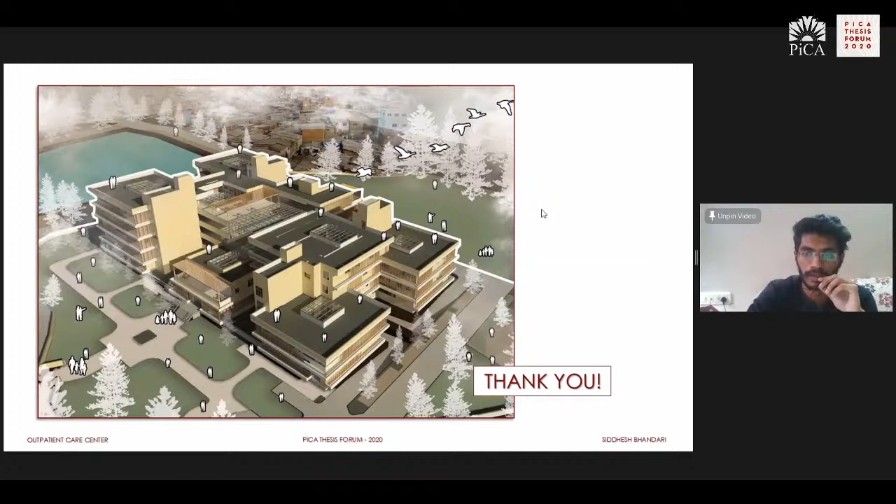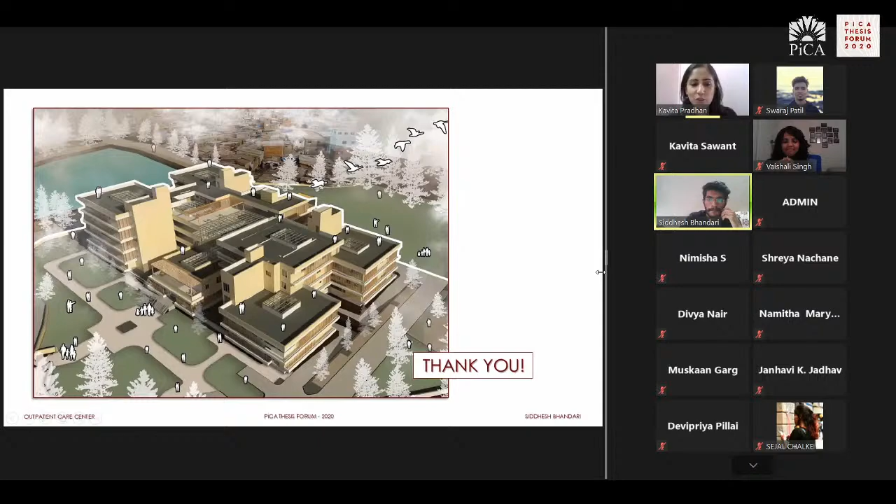Yeah, that was really nice presentation, Siddhesh. And I really enjoyed seeing your views and how you compared with the existing case studies which you have done, the typical hospitals, and then how your solution takes care of various problems. So that was very interesting. And interesting, Vaishali, your presentation too.